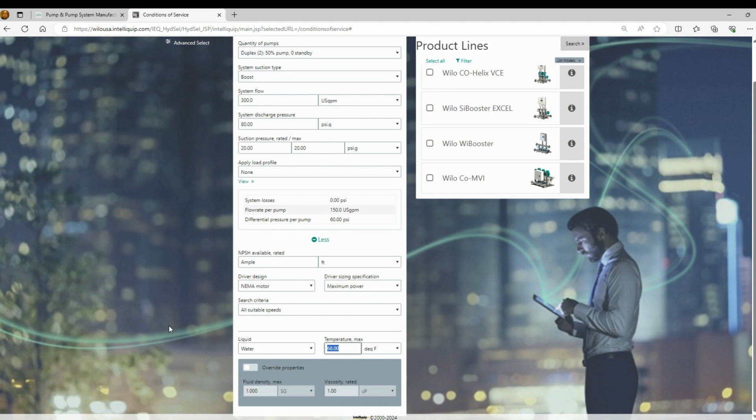So in this example, we'll do 300 gallons a minute. We'll do a boost application. We will do a duplex with 50% flow split, and we will set our discharge pressure set point at 80 psi. And then we will set the suction pressure at 20 psi. It is important to note down below there are some options, and the only option I would really use down here would be to change the temperature. As you change the temperature of the water, the program will calculate density, and it could potentially require a larger motor if your density changes.

And then over here on the right, we have product lines to choose from. So initially, as you're getting started with booster selection, I would just encourage you to check all the boxes. So you can just click select all, and then we can search from there. For this demonstration, I'm just going to go ahead and select one to make things easier and straightforward for the training. So we're going to select our Wilo Co-Helix. And then you would click up here on this search.

So these are our results. First thing to note is that there's a sort by field up here at the top. The default sort for most of you is going to sort by efficiency, which for pumps would be good, for boosters not necessarily, and I'll show you why that's the case. So we have at the top our Co2 Helix V190-3. It has the best rated horsepower, the best efficiency, but it is hitting the primary duty condition at 2,500 RPM roughly.

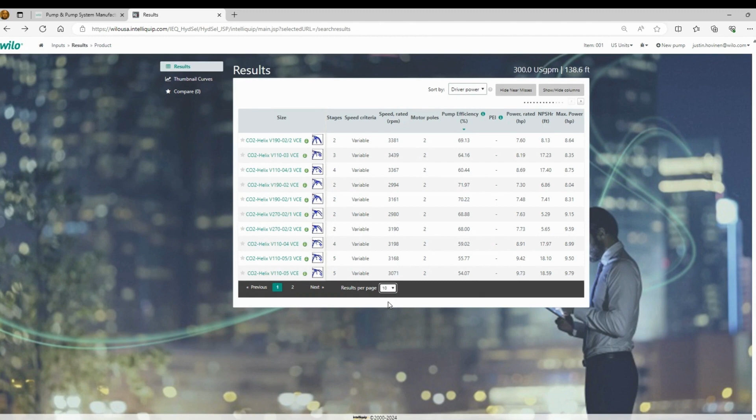So if we change this to sorting by driver horsepower up at the top, we'll notice that V190-3 is no longer even on this list. So we'll actually expand the results, and we have it down here. It was actually on the second page. So, and we'll see why.

So now we have the Co2 Helix V190-2. It is hitting the primary duty condition at 3,381 RPM. The pump efficiency is actually 69%, so slightly less efficient. Rated horsepower is similar, but if we go over here to the right, we'll see a column called minimum recommended motor rating. So this booster is 10 horsepower.

If we go back down to the original selection that was sorted by efficiency, that was actually a 20 horsepower motor running at very reduced speed, very efficient, but you're going to cost yourself out of any job. So we have competition, and no one on this particular duty condition, 300 gallons a minute, is going to be quoting a 20 horsepower motor. So this is a better selection with a 10 horsepower motor. We're going to have smaller motor, smaller manifolds, and overall a better cost on the system.

The second sorting field that I always use is percentage of BEP. So this Co2 Helix V190-2 is actually right at 100% of BEP. That's perfect. So that means that's where the pump is designed to run. You're going to have overall smoother flow through the pump. There'll be less vibration, and the life expectancy of the pump, the bearings in the motor, the mechanical seal are all going to be longer when you're closer to BEP.

If you have a selection that is between 70 and 120% of BEP, that's also fine. That's what we would call the preferred operating region. And that's kind of where you want to be for pumps or booster systems.

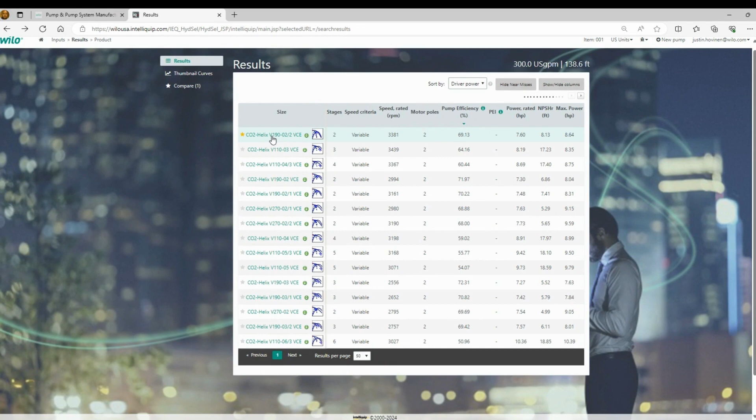So we're going to go ahead and select this booster at the top. It has the smallest motor possible. It's very efficient still. It's operating close to full speed. So we know we have the smallest manifold, smallest motor possible. So we'll left click here, and it's going to take us into the main selection screen.

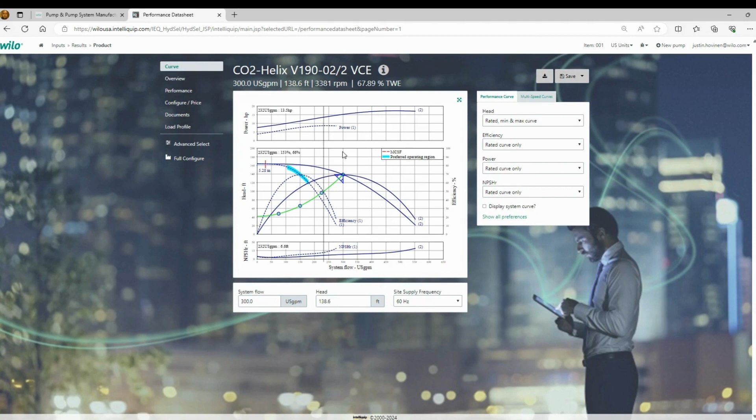Over here on the left, we have our curve, which is the screen that starts us. It shows single pump and two pump operation. We have an overview, which is just going to give basic features for the booster. We have performance, so that's going to give you rated horsepower, RPM that we're running at, pump efficiency, number of stages of the pumps, that kind of information. We have our configuration and pricing tab, which we'll get to here in a second, where you can choose your voltage and all your options.

And then we have our documents. So this is going to help you generate a submittal, and within 5 minutes be able to quickly submit on a project if you get a request from a customer.

So the next thing we're going to look at is the configuration tab. So you'll see here at the top, the first area is going to be the voltage. So you can choose your voltage. There's options here for 3-phase 208, 3-phase 460, and then 3-phase 575 volt. If the booster is smaller, you're going to also see single phase options available.

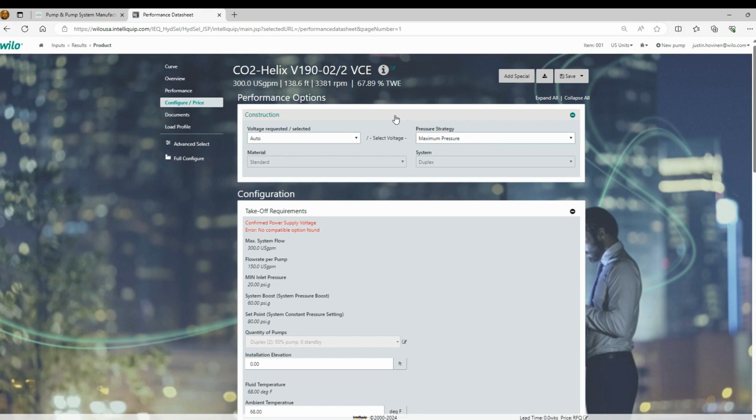There is an area over here to the right called the pressure strategy. Always leave that at maximum pressure, and that's just going to make sure that the system is designed for the pump running at shutoff.

As we continue to go down, there are some additional fields for installation elevation and ambient temperature. These fields are not doing any calculations in the program, so this is more for information only. If you're in the Rocky Mountains and you have a higher elevation, you can show that and it will show on your documents. We're not going to be upsizing any motors or providing anything custom based on you changing the elevation.

Now we're going to review the rest of the documents. The first document up here at the top is going to be our performance data sheet. So we'll take a look at what's included in this. So we're going to have our operating conditions, our performance criteria at the rated speed of 3381 RPM. We need to hit this operating condition. We have our liquid at 68 degrees Fahrenheit, which can be changed in the selector, and that will change the density of the liquid if you do change it.

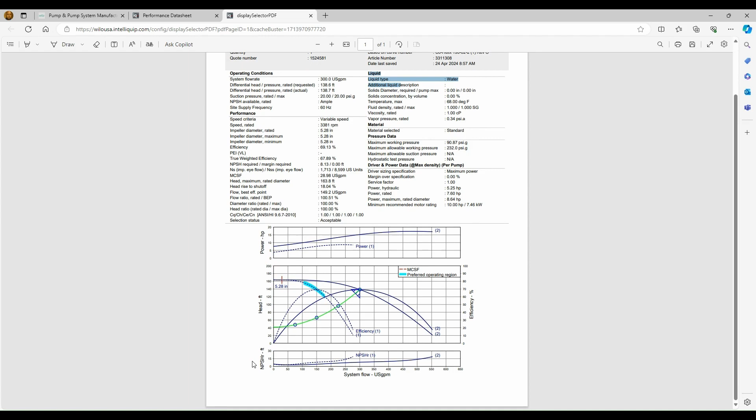So it could potentially affect motor size. And then we have our driver power and data over here, which will show us our rated horsepower, the max horsepower, and the overall motor size on this system. We also have horsepower shown below, our performance in flow and head, and then we do list our NPSH values.

So the next document is going to be the multi-speed landscape curve. So this is what it's going to look like, and it's going to show us our various operating points at reduced speed. It's shown in RPM, but we do have the option to go in here in the quick select and change this to frequency if you are dealing with a customer that is electrical in nature, or is just concerned about, are we running at 60 hertz? Are we running at 50 hertz? We can depict these various variable speed curves in frequency as well, which is kind of nice.

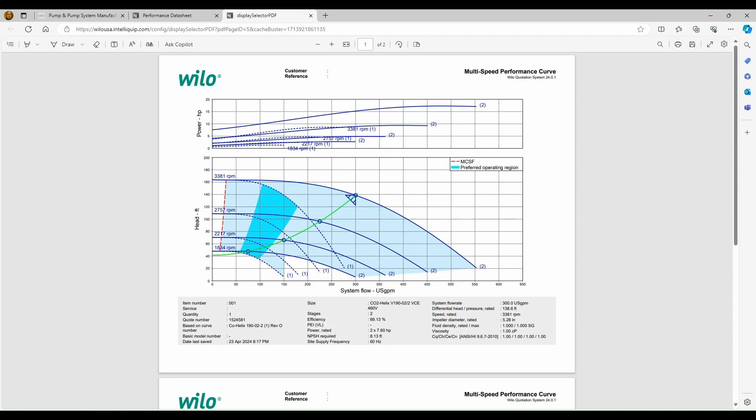The next three documents are going to be pricing sheets. So we have an internal price sheet, which is going to be for our distributors to show you what your multiplier is times list in order to get your net pricing. We also have a customer price sheet and a customer price sheet with details. I already showed you this customer price sheet with details. The only difference in the customer price sheet without the details is going to be that it shows you a total list price, and it doesn't have the breakdown with all the article numbers and all the itemized pricing. So it's a cleaner way to look at what your total list price would be for that booster.

With the next two documents, we're going to get into our drawings. So we have a document called the general arrangement drawing, and then we have a document called the submittal document. So I'll click on the general arrangement drawing. These general arrangement drawings work really well for our individual pumps that we sell. They have a lot of detail. For the boosters, there's really not that much detail. It's giving us our overall dimensions. It's giving us horsepower, voltage, flow, head, and then it also gives us the manifold size.

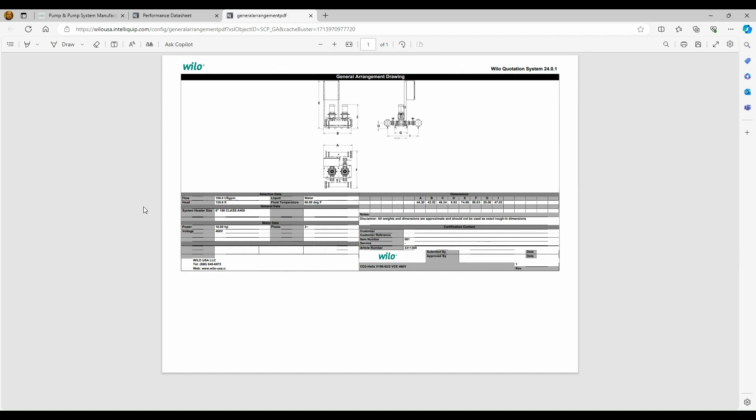The drawing is very small. This is not a very clean look. So I would advise you just to not use this drawing when you're selecting boosters. This is not a document that looks great. We do have a document that looks great, which is our submittal data sheet. So we'll click on here.

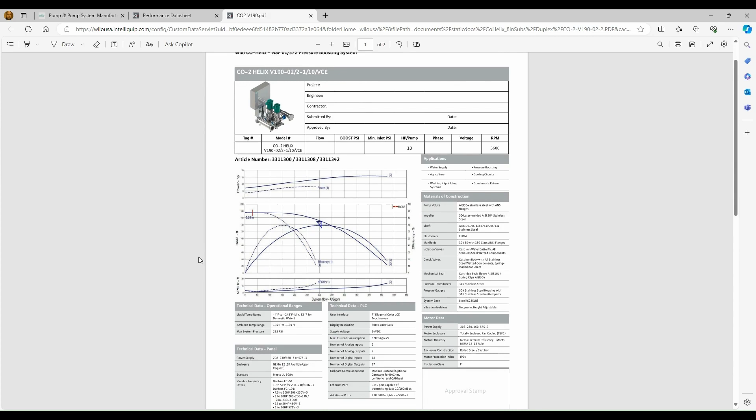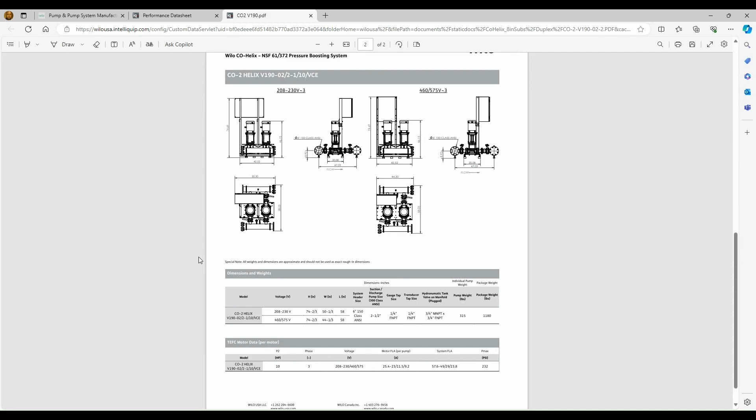There's a lot of different information included: materials of construction, motor data. We talk about the PLC, we talk about the panel, we have our performance curve shown, and then we have a great general arrangement drawing. So we get down here, it's going to give you your total system weight, manifold size, full load amps at different voltages, maximum pressure, everything you're possibly going to need to submit on. So this is the document. If you're submitting a drawing, I would use what's called our submittal document.

The next document we have here is the brochure. We're going to skip that for now. It just basically covers all of our boosters, and it's a general brochure that you can use for selling. I'm going to get into the website in a little bit, and we'll kind of cover another location where you can find this document. It's not something I would typically send with a submittal.

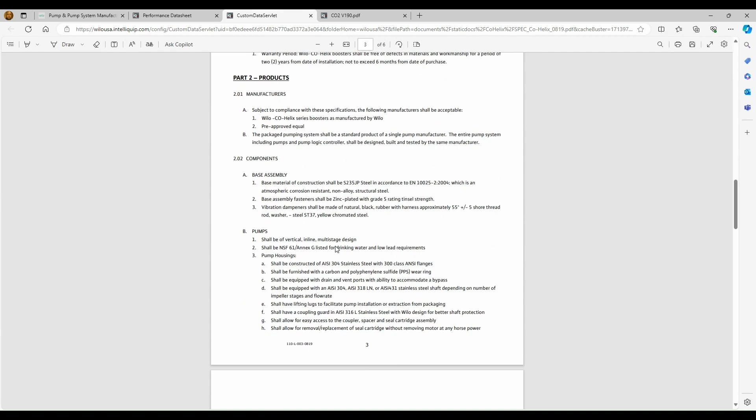So then we'll get into the specification. The specification is just a full written specification for this product line. We're going to cover materials of construction, components for the base assembly, pumps. We're going to get into the mechanical seals, the motors, control panel, the PLC. It's got everything in here you'll need to work with an engineer on our written specifications.

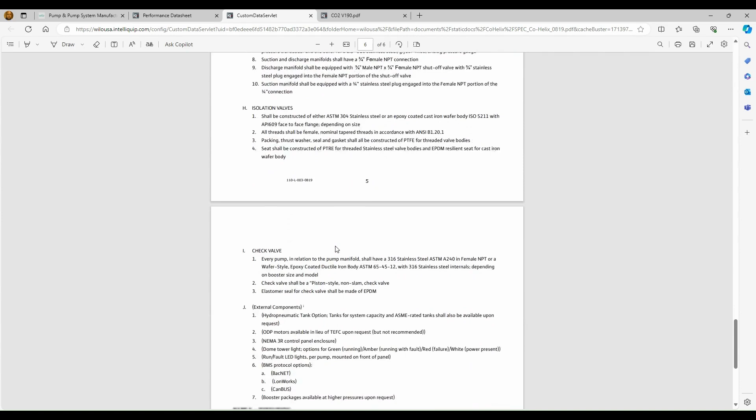The next document we're going to cover is the takeoff sheet. So this is an important document. This is going to be required for when you do submit a purchase order. We're going to require this along with it as well. And it's going to have some important information. You're going to need to confirm your model number just to make sure we don't make a mistake. Some of these pumps have similar model numbers and they may have a difference in stage or horsepower.

So we need to make sure we've got the right pump. And then oftentimes we'll have projects where someone reaches out with limited information. I may have quoted it last June. We thought it was 230 volt and it turns out that it's 460 volts. So by having this document, it allows you to go back to your customer, confirm that power supply, because that's not something that's modifiable in the field. Or at least it's not very easy to modify in the field without having some expertise in control panels and how to change the fusing. You're most likely going to need a new control panel.

And then we're asking for maximum flow, minimum flow, different pressures, your set point. And this document will follow your booster all the way through the order entry process. And it goes out to the test lab. So we can actually test your booster to your job conditions. And then this sheet will get signed off on and just ensure that everything is per your specifications.

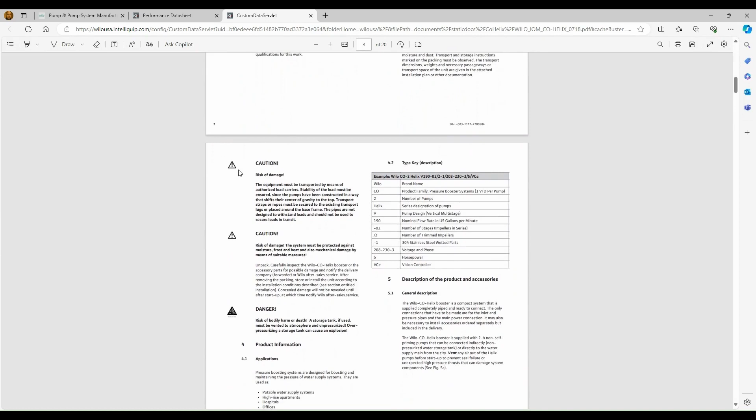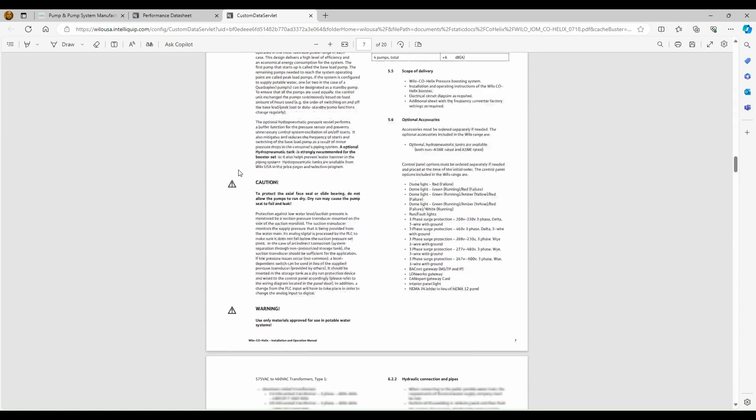The last document we have here is the installation and operations manual. So we'll take a quick look at this. It's pretty straightforward. It's going to give you everything you need to know about installing and operating the booster. We have some simple diagrams that show you the various components of the booster, where to set the tank pressure if you do use a pressure tank. We've got some wiring schematics for the control panel in here.

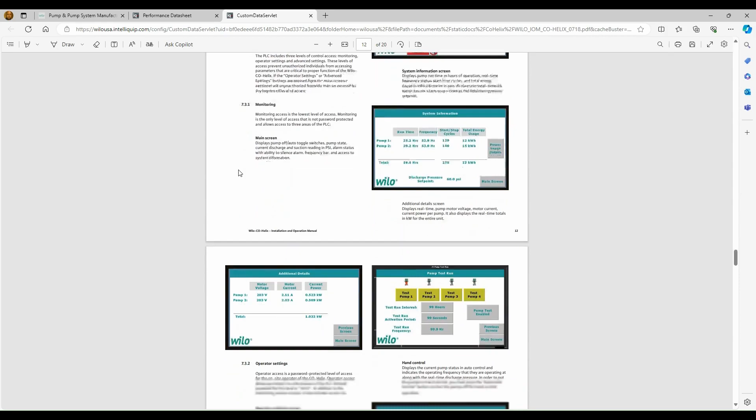We also take you through the screens, right? How do you start the pumps? How do you test the pumps? How do you set alarms? So that's all in here. And then one of the most important parts is we do have a troubleshooting guide at the end. So if you do have any issues on startup, you can kind of reference this guide and it'll tell you the cause of the issue and maybe what the remedy is. So we've thought this through. It's a great document.

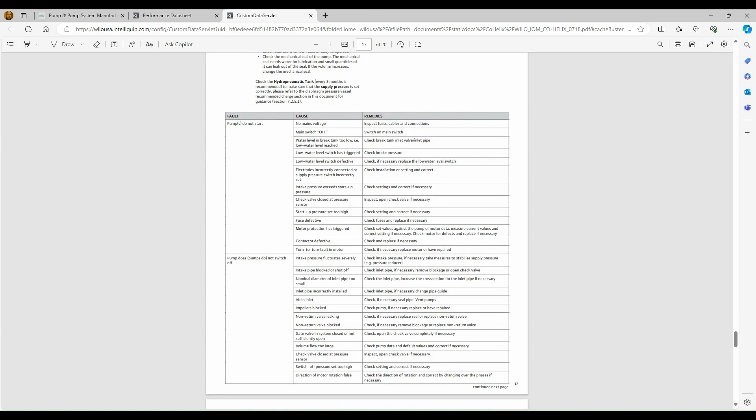And now we've got our submittal document completed. So how do we download it? So you're going to basically go through and just select any of the documents that you want. There's two ways to do it right here at the bottom. You can either generate a PDF, which is going to include all of these documents in one long PDF, or you can generate a zip file. So sometimes that's nice because you can itemize all the documents in PDF and then keep the price sheets separate, which you may not want to send to your customer.

So now that we're done showing you the documents, we'll go back to the dashboard here and we'll size a booster a different way. We'll go to a project and we'll just assume this is a project that we're going to add multiple boosters to. In this case, we'll only do one. We'll do project 12345. Project status open. And then save. So this is going to be your basic project information overview. And then all you'd really do is just come up here on the right hand side at the top and you're going to click new item.

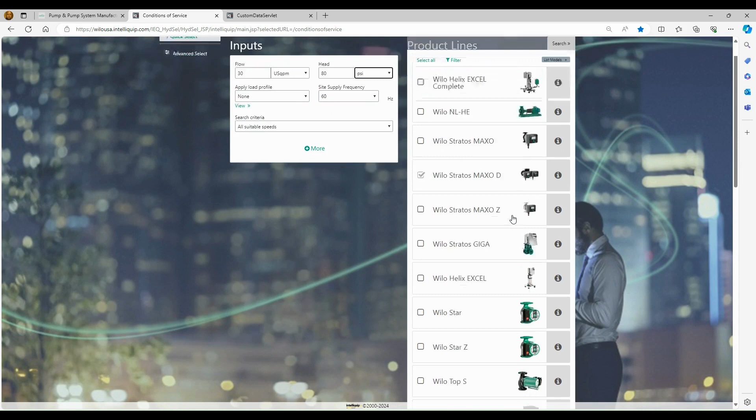And then this time we'll do select pumps and simplex system. And we'll do a quick little sizing on a simplex system. So we'll just do 30 gallons a minute and we'll do 80 PSI. And then we will select the Helix Excel Complete. This is our ECM simplex booster pump version. We'll click search, and then same thing. So it's given us a bunch of different options.

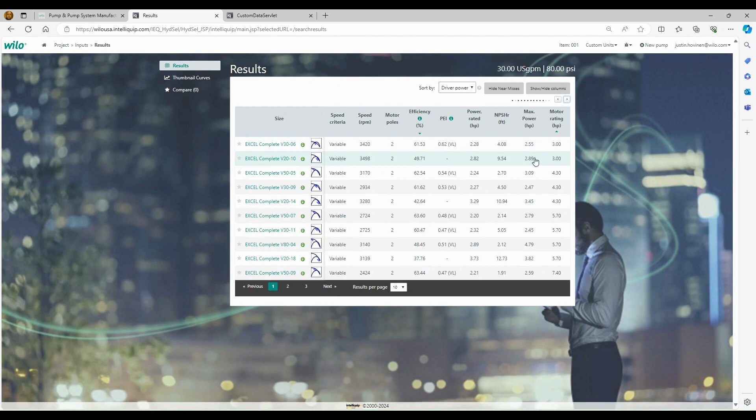It's sorting by efficiency. So we'll see it's the Helix V50-10. So we'll change it to driver horsepower. And now we've just gone down in size, and now we're at a Helix V30-6. So if there's one takeaway, definitely sort by driver horsepower. So that gets us down to a 3 horse. And then we'll go in here. We'll configure and price. We'll do standard features. And then basically all we're going to do up here in the right-hand corner is click save.

It's thinking. Usually it takes a few seconds. So that has saved this project. So now that we're done with our selection and kind of reviewing the selection software, we're going to go back to the website, and we do have some additional submittal information and also marketing materials available.

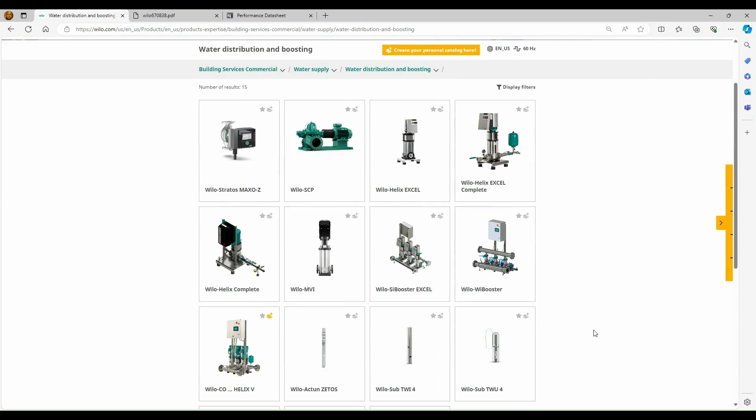So we would go to wilousa.com again, and we'll go under products. There are 3 tabs depending on market. We're going to have building services, commercial, water management, so our municipal friends, and then industrial. Each one has water distribution and boosting listed. Any of those links will take you to the same product homepage. So we're going to click on water distribution and boosting, and all of our products that we sell into that market are listed here.

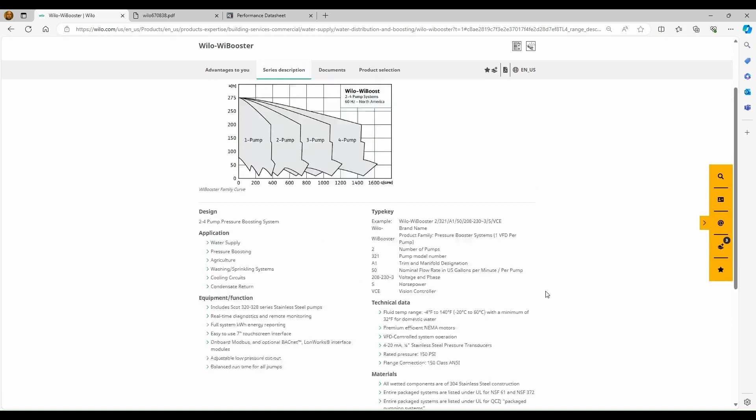We'll go into the WiBooster, for example, and we have different options available. We have advantages to you, which is just going over the features and benefits of the system. We have a series description, which just kind of covers some of the general specifications for the booster, and it has a nice family curve showing you the range of the booster.

Then we have some additional documents here available. So we have the IO&M, we have an engineering specification, which we covered. We have our brochure available here. And then we also have our certification. So we have our UL package system certification available, and then our NSF certification.

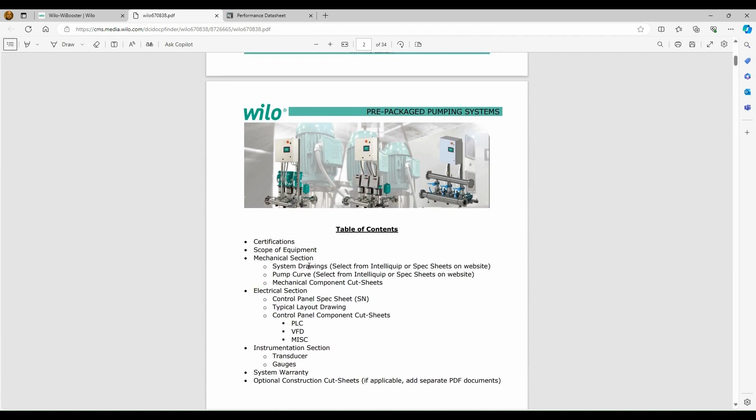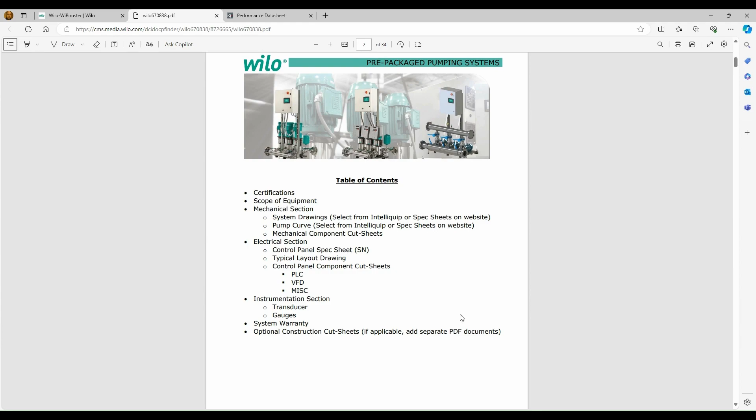Then farther down, we have our submittal documents that were also located in the software. We have our takeoff sheet, which I reviewed. And then we do have some additional booster submittal forms for more in-depth submittals. So this is what that document will look like. And as we go through the table of contents, we have certifications, the scope of the equipment. We have a mechanical section, an electrical section that covers the control panel, the PLCs, the VFDs, and then all the instrumentation and cut sheets that are going to go on these boosters.

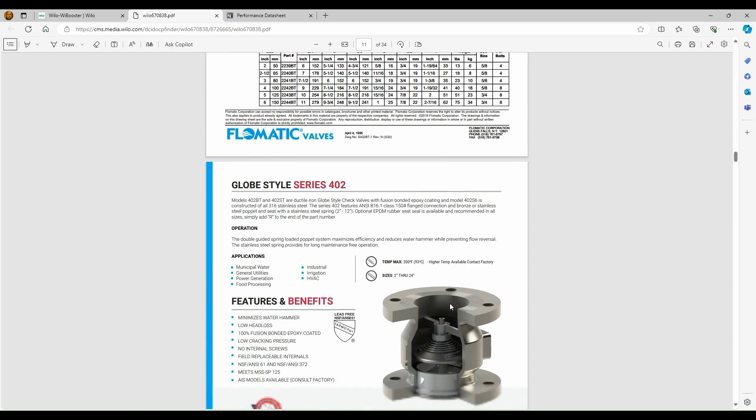So we'll just kind of scroll through here. So this will need to be marked up per project because it is a general submittal. So we can work with applications engineering on the Wilo side, and we'll help you go through this for any in-depth projects where you're going to need a submittal with all this detail.

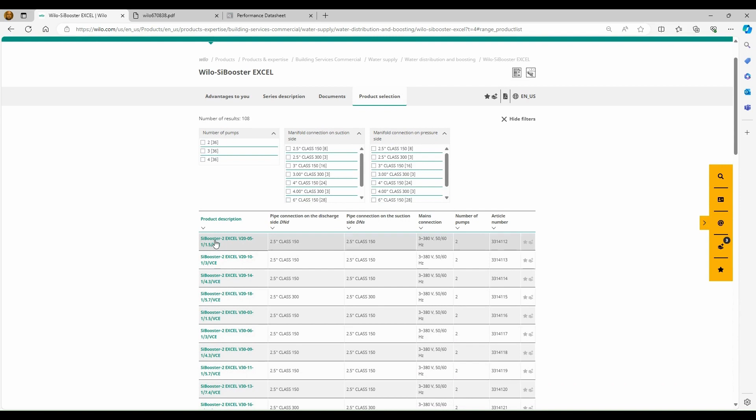So what if we need 3D drawings for the booster? You'd go to this last tab called product selection, and basically we'd take the booster we just selected in the software, and we can either search by article number here, or we can narrow it down by the number of pumps and the manifold size. You'd find the associated booster you just selected, click on it, and then we'd go over here to this area, BIM CAD, and we're going to have step files available for each booster.

There currently are no other file formats, but we can help you with other file formats upon request. Just give us a couple of days. We can help you with Revit or other files.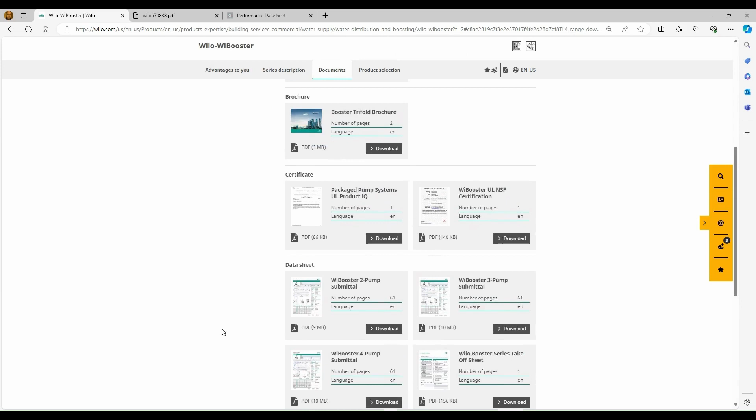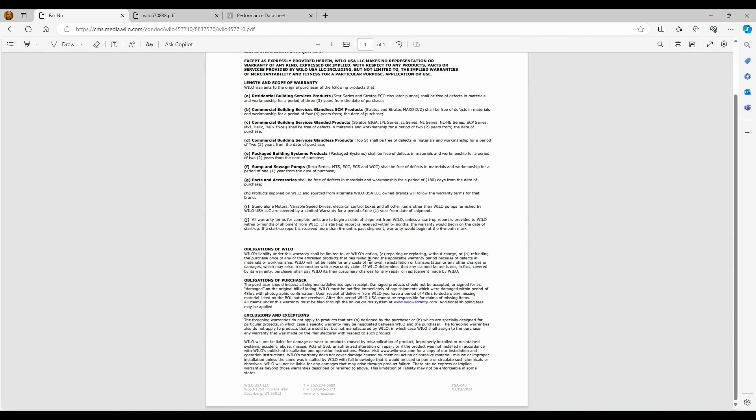And then the only other document that I think y'all might need would be our warranty information. So you'd go back to the website, scroll to the top, and there's an area up here, service and support, and then you'll go down to warranties. So this has the various different warranties. So the warranty for the booster, since it is primarily a building services product, although we sell it into other markets, you'd go into the building services warranty, click on this PDF, and it's going to take you to our warranty information and what's covered under the warranty. So this might be the last document you might need to fill out a submittal for your customers.

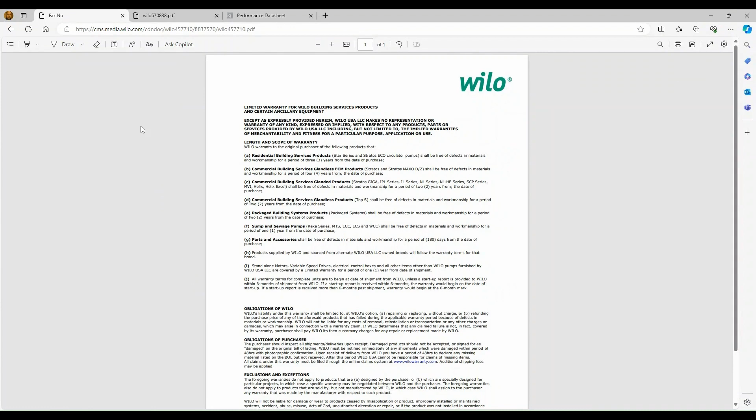So we've got a really good track record of not having warranty claims on our boosters, but if there was ever a warranty issue to arise, we'll cover where you would go and make a claim. So the same area would be service and support, and then you'd go down here to the area submit a claim, and it's going to take you to the Wilo warranty claim website, which is wilowarranty.com. You need your order information, your original order number.

You can go into this claim, put a description of the issue, and you can actually attach pictures. Someone will then reach out to you with a disposition or any questions, and then you can track the claim, any parts that we might be shipping to you, anything like that within this warranty claim software. So it's really, really nice to use.